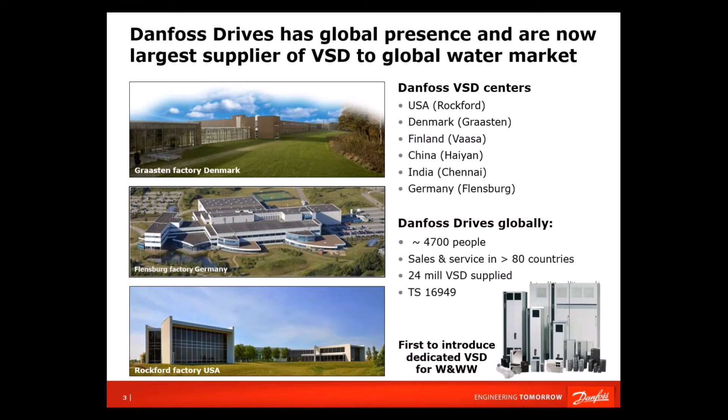We are also serving and supplying into the automotive industry, and that means the whole group complies with quality demands from that industry. But not more about Danfoss - that was just a super short introduction to who the group in fact is.

But back to water and the serious issues about water. What you see here is a picture from the World Economic Forum, where people meet in Davos. You probably have heard of government people, NGOs, CEOs and so on meeting once a year, and one of the things they are asked as participants is to try to paint a picture of their point of view on what type of crisis the world could potentially face within the next 10-15 years.

What they ask is basically to evaluate from two points of view: the well-being of people, and economical growth. So what could limit these things? They look at the likelihood that a crisis will appear, and if it appears, what is then the impact of it? And what you will see - at least the first time I saw it, a little bit surprising - is that a water crisis is very high on the agenda. It's very likely that within 10-15 years we will hit such one.

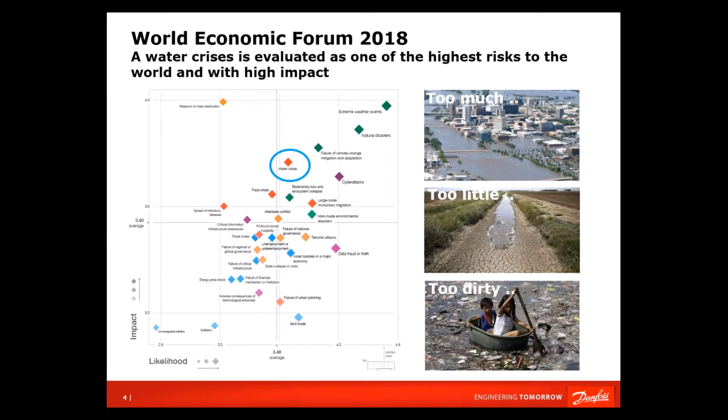There will be places where the biggest problem is too much water, as we see in the top picture, and there will be places where there's no water. There's also a lot of places where the water is too dirty. In fact, only 20% of all wastewater on the planet is treated right now.

But if we look a little behind how that can be, it's important to realize that when we normally think about water, we think about water supply into the cities and households. But water is also fundamental for close to 50% of our food production, which depends on irrigation.

So if there's no water, the farming industry will not work, and that will hit a lot of other industries. The same is true on the energy side, where it's claimed that around 90% of all energy production depends on water for cooling purposes. There are facilities around the globe where power plants had to reduce their energy production simply because there was not enough water.

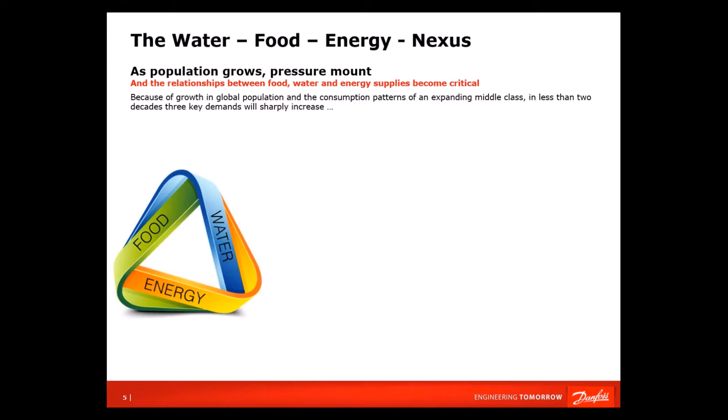What is also the case is that water is already over-abstracted in a lot of places around the globe. We have California as a case, we have the southern part of Europe as a case. We know there are places in both India and China and elsewhere where groundwater is used much faster than nature is able to regenerate it. So that's where we are now.

If we look 20 to 30 years out, we all know the population will increase. We also know, which is a very good thing, that more people will move out of poverty and into the middle class, and that more people will move into cities. It's expected that within 20 to 30 years, 70% of people on the planet will be living in cities.

That, of course, puts pressure on needing more food and more energy, and at the same time there are other things which influence water consumption. One question is why it means something that people move into the middle class—the reason is that the type of food consumed tends to change, to a type of food which consumes a lot more water.

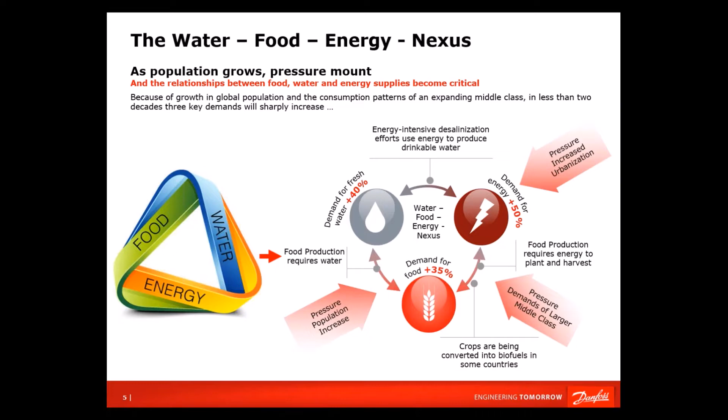The end of this story is that it's expected that within the next 20 years we'll need 40% more water than what we're using today, and that's on a basis where we're already overdrafting the water resources we have. So saving water and finding solutions is a key thing—that's why water is so high on the agenda around the globe.

What a lot of people may not be aware of is that the water industry is not only super important for the food industry and power generation, but is itself a major energy consumer. We at Danfoss have worked with the International Energy Agency a couple of times, first back in 2016, related to the water industry, and they made a global survey and estimation.

on how much energy the water industry is in fact consuming, and came to the conclusion that around 4% of all electricity on the planet is used by the water industry. This is equivalent to all the electricity used in Russia.

What is maybe as interesting is that 30 to 50% of the electricity bought by municipalities is related to the water industry. And in 2018, they also looked at the Sustainable Development Goals, and as part of that is to build a lot more wastewater facilities.

If we comply with these goals by 2030, you could build traditional wastewater facilities, or you could build what I'll tell you something about—wastewater facilities which are able not only to clean wastewater but also to generate electricity at the same time.

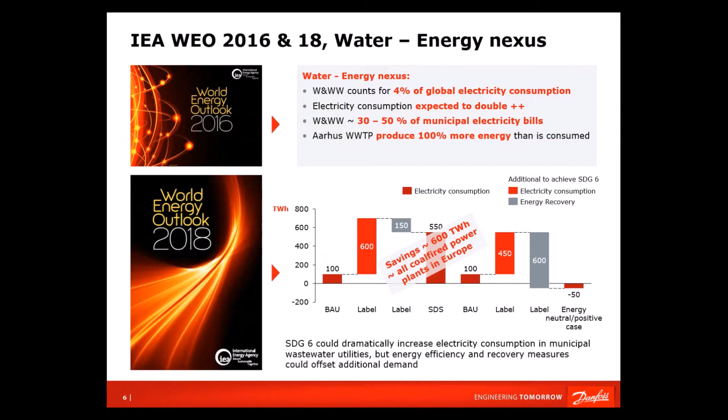The difference between these two approaches, as they found, was close to 600 terawatt hours—to put that into understandable terms, that's an energy volume equivalent to being able to close all coal-fired power plants in Europe.

So this means something. And finally, as an introduction, also a little bit from Canada, splitting down further what the authority's electricity is used for. And as you can clearly see here, the water and wastewater facilities are the high runners. There's also a comparison here to street lights, showing that water and wastewater facilities use 5.5 times more energy than street lights.

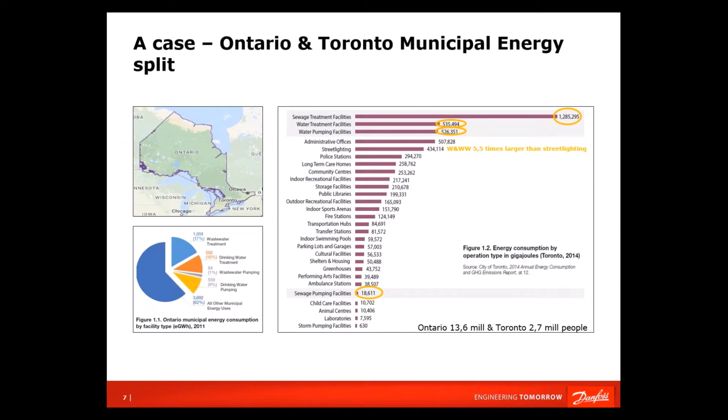So, looking at water and wastewater facilities, why is there so much to gain by using a lot more smart process control? The very basic reason is that if you had a food or chemical facility, you'd probably start at 6 o'clock in the morning and close down maybe 4 o'clock in the afternoon, or if you run 24 hours, you'd run pretty stable at 70-80% of the load.

If you look at the water industry, then as we all know, it's fluctuating up and down - we have 10-20% load during nighttime, a peak in the morning and afternoon, and we run 24/7, 365 days. So it's an industry where, whether we like it or not, the fluctuation is very high, which means that if you don't have a system that automatically adapts to these fluctuations, you'll use far too much energy and chemicals and other things.

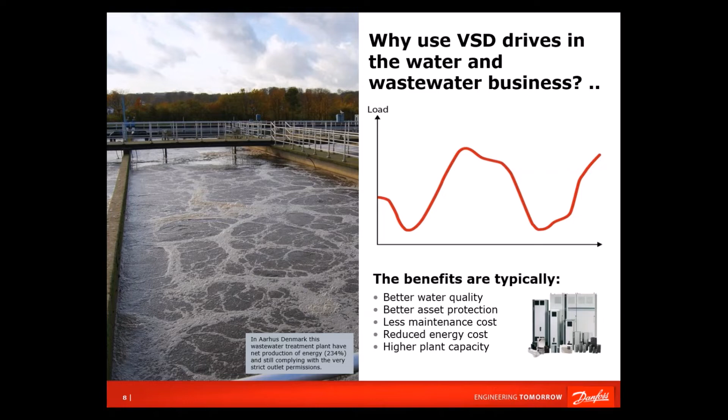So that's why we see that when facilities really try to go to the full extent of what is possible - what nowadays is called digitalization - we see major results, and I'll come back and explain about these. If we look at the whole water cycle and what they have done in the case I'll refer to here, they've had a 2-tier strategy to reduce net energy consumption. The first has been to secure that you reduce energy consumption as much as possible during all the phases.

So if you look at water production, they've cut down on the energy cost in relation to providing raw water. They've made major cuts on water distribution, and we'll come back and talk a little bit about that. They've also been able to cut the energy consumption on wastewater pumping, as well as on the wastewater facility. And what's important at the wastewater facility is that if you do it right there, which we'll also come back to, you'll be able to generate lots more energy.

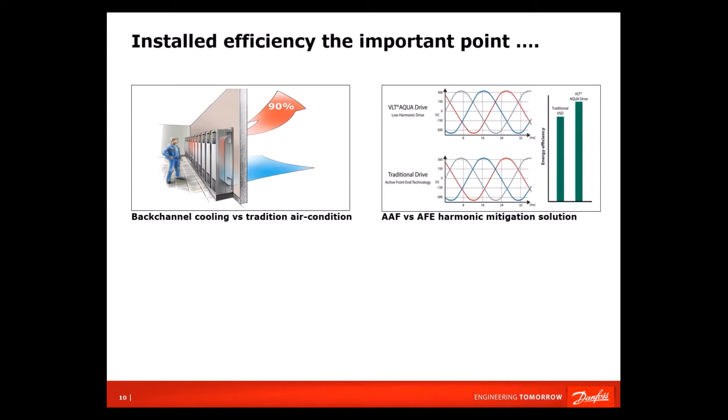But some of them, especially for the water industry, advanced active filter technology will do the same job or better job than traditional active front end, but will do it using a lot less energy.

Without deep diving too much into this, the results show that by choosing one variable speed drive supplier versus another, you can see 2 to 4% difference in installed efficiency. You could also choose to step up in motor efficiency, but that would only offer around 1% gain. So instead of stepping from an IE2 to IE3 motor, you could gain 2 or 3 times more energy savings by choosing the right variable speed drive solution.

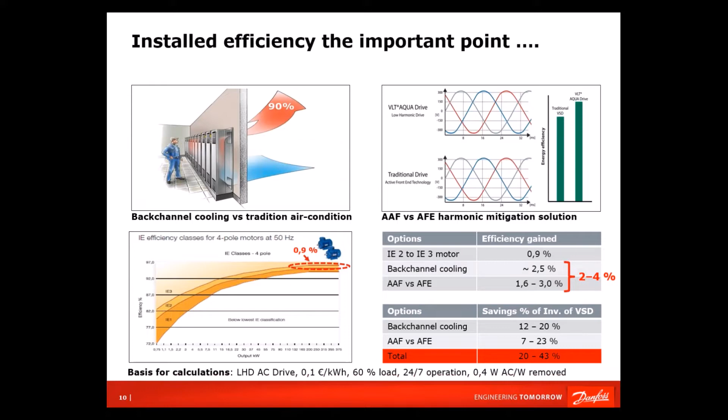Which of course from our side is the Danfoss solution, where we have these opportunities both on the heat side and on the harmonic mitigation side. Coming back to the process part of it, this was just mentioned a little bit about how it's important to have efficient components.

But on the process side, we know that when we are supplying water into the network, we see leakage, and it can be quite expensive to repair and handle. What you see here are a few pictures with figures indicating non-revenue water as a percentage, fluctuating from 4 or 5% up to 50, 60, or even 80%. So leakage is a main issue.

In the US, it's claimed that there are 850 water main breaks each day. So it is a real issue.

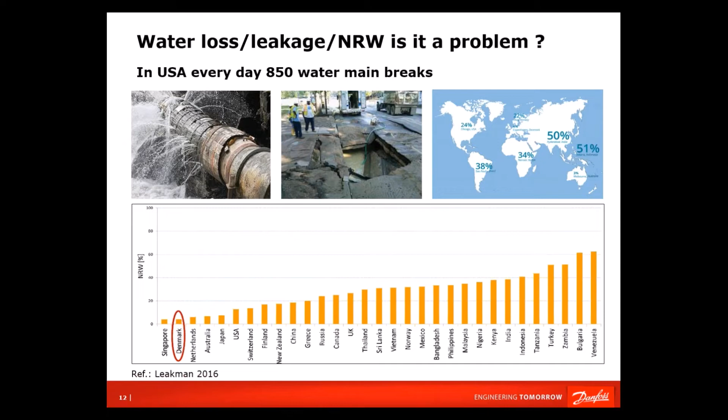What then to do about it, or what type of leakage do we have? I think it's important to realize there is what we call background leakage, in joints and so on, where there's small leakage going on underground, not visible. There will be cracks in the pipes, also not visible, not large enough that the water will just run out into the ground.

Finally, we also have the type of leakage where water is coming to the surface, as we just saw in the previous pictures. Now what's interesting is that when you look at the tools you can use, pressure stabilization and pressure reduction is in fact the tool you can use to attack all three of them.

Of course the last one, where it's coming to the surface, you have to repair the pipes, no doubt, but otherwise pressure stabilization and pressure reduction will be a key thing. Quite often it's thought that these major bursts, where you see water flying 5-10 meters up in the air, is where the main water loss is.

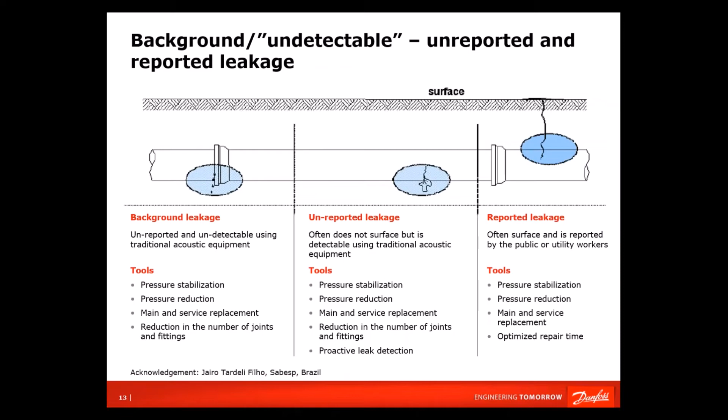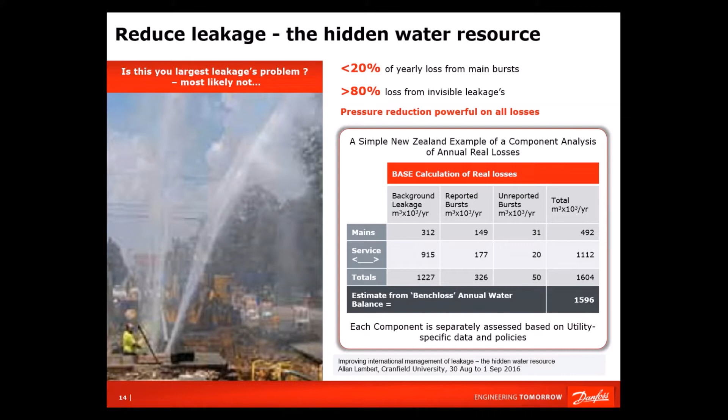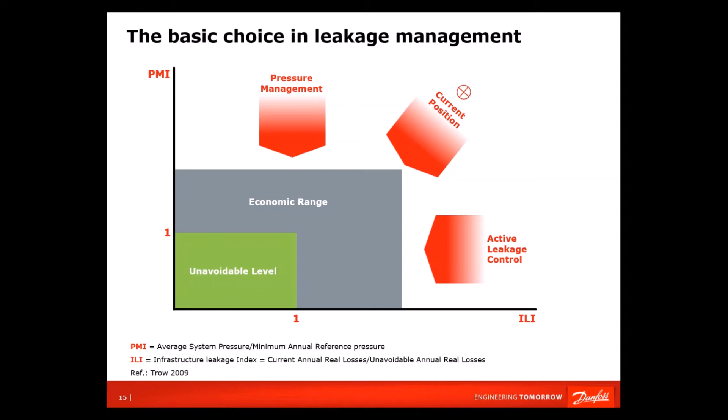The reason is that these leaks are running 24/7, 365 days a year. Therefore, to really get leakage down, it's important to look at pressure management. So what can you do about leakage? You can do pressure management, as we've touched on, and you can do what's called active leakage control, which is basically to replace pipes. But nobody can usually afford to replace all the pipes, so it doesn't make sense. As we've just seen, if you want to attack the 80%, pressure management is the cheapest way to attack that.

And what do we then mean when we say pressure management, and what is the thinking behind it? If you look here, imagine we have a city with a couple of high-rise buildings, and we assume we want 20 meters of pressure on the taps in these buildings, then we would need a pressure as indicated here with a green line.

If we then have one single pump at the waterwork, and we also have a small hill here where maybe a few people are living, you would have to ask this pump to put the pressure the whole way up to what is stated here as the original hydraulic grade line. You will have some pressure loss, but you'll see that the people living on the hill also have their 20 meters of pressure, and the people living in the city also have their 20 meters.

In fact, they have probably 60 or 80 meters of pressure, so they have a lot more pressure than they actually need. Besides consuming a tremendous amount of energy, this is also stressing the pipes. So what to do about it?

One solution is to install what we call a boosting pumping station, basically a drive, a pump, and a pressure transmitter. That means the pump at the waterwork only takes it halfway now, to an optimized hydraulic grade. There will be some pressure losses, and then the boosting pumping station takes it up from there, and again the person living on the hill will have his pressure.

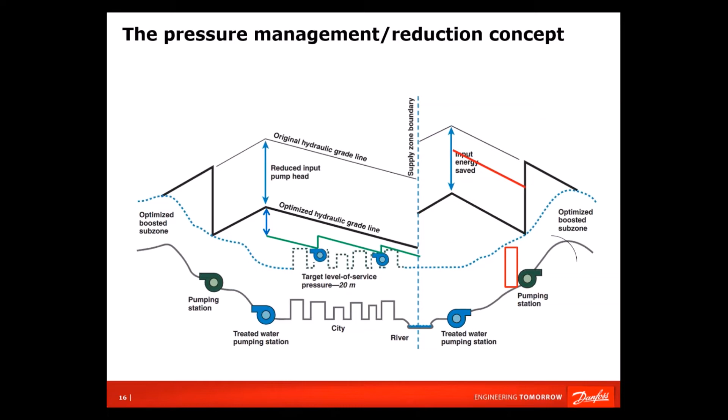This is from a case in the US, where they were pretty sure they were in control of the pressure, but it showed there were a lot of spikes when they began measuring the pressure in real time in the network. I won't deep dive too much into it, but again, one thing is getting the pressure down, and another thing is avoiding these pressure spikes, as you see here.

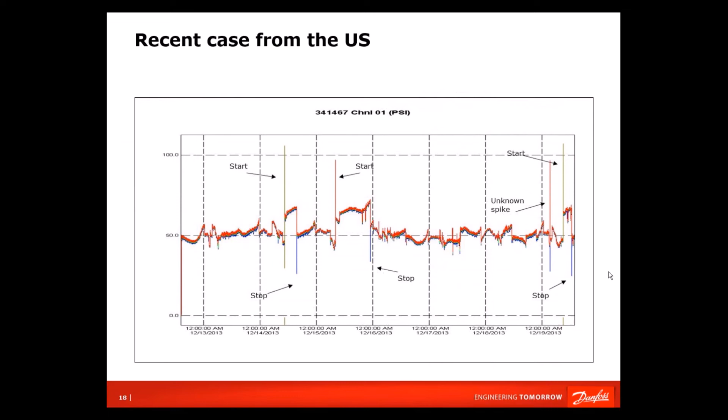This is a little bit interesting, because we all know the water network differs from city to city, so it's difficult to come to a single conclusion and say this is just what everybody has to do. But the basics we can say something about, because this is an overview of statistics from 112 systems in 10 different countries where they tried pressure management.

What they gained on average was a 38% reduction in pressure, which offered them more than a 50% drop in the amount of new breaks. Immediately after installing this pressure management — basically without replacing any pipes — they were able to cut their water leakage by close to 40%, and energy consumption also dropped by 20 to 40%. The pipes will most likely last longer, and there will be fewer complaints from the people in the city. I think it's quite impressive that you can gain so much without replacing pipes, just by going in and regulating the pressure.

So that was a little bit on water distribution.

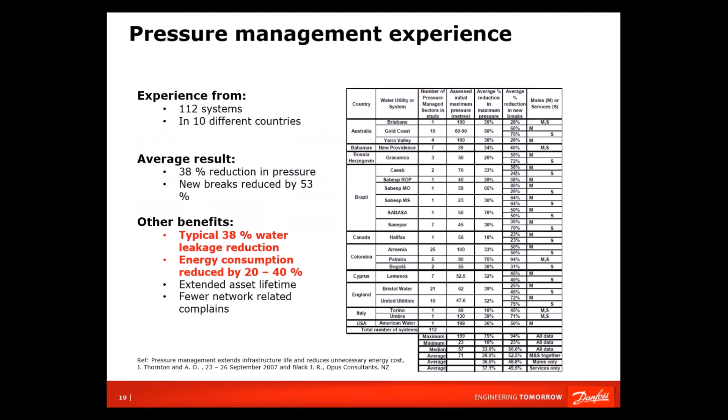Then on wastewater pumping, usually the thinking is that there is not so much to do because it's typically gravity forced. So the water is basically running just based on gravity, and then it's lifted in a pumping station. And one can say, what can you do to save energy there?

One of the things one can do, which we have embedded in our Aqua Drive as a standard, is what we call deragging, which basically is a function to secure against wastewater pumps having a tendency, especially in the sewage canalization system, to clog over time. One way to avoid this is to have the drive measure the power consumption at a given speed. When the power consumption goes up at a given speed, in 98% of the cases it will be because of clogging of the pump.

What the variable speed drive will do then is turn the wheels in the pump the opposite way. In fact, it will not only turn it, it will start running a little bit forth and back, and in that way it will make a type of washing of the pump, getting rid of all the dirty stuff clogged in the pump.

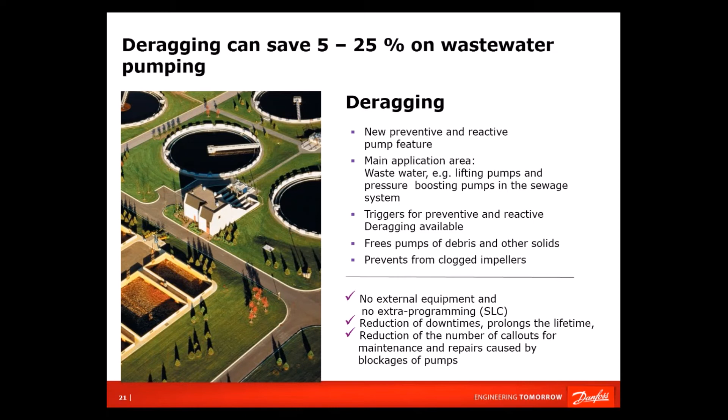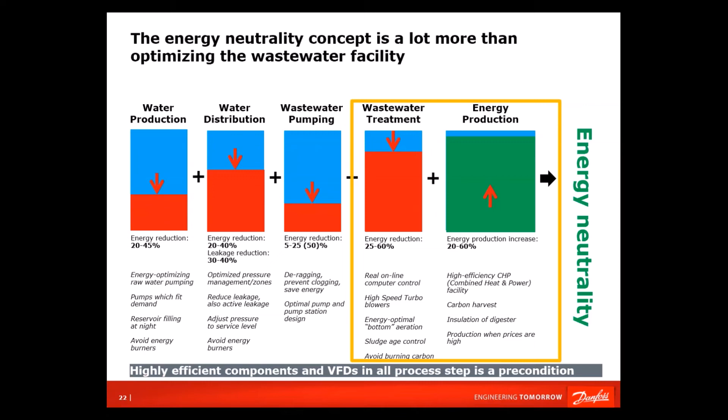Finally, to the wastewater facility - there is a lot to do, and a lot of processes one could go into. Before we do that, I would like to show you the figures. This is a case from Denmark for 200,000 people, where you have both the drinking water network and the wastewater facility.

If you look at the figures here, you will see they used 3.2 million kilowatt-hours on providing drinking water, 0.8 million kilowatt-hours on pumping wastewater, and to treat it - you can see the figures here to what level the wastewater is treated - 3.2. So in all, for the water cycle as such, for these 200,000 people, they used 7.2 million kilowatt-hours per year.

They have been able to get 4.8 million kilowatt-hours in electricity production and 2.6 in heat, which is surplus heat they are using in the district heating system, offering them 7.4 million kilowatt-hours. That means they are producing more energy than they need, both for providing drinking water, pumping wastewater, and treating the wastewater.

If you look at the treatment facility, the wastewater facility itself, it's producing 234% energy, meaning 134% more energy than it needs for treating the wastewater. So we are not only talking about energy neutral wastewater, we are talking about it producing double the amount of energy needed for cleaning the wastewater.

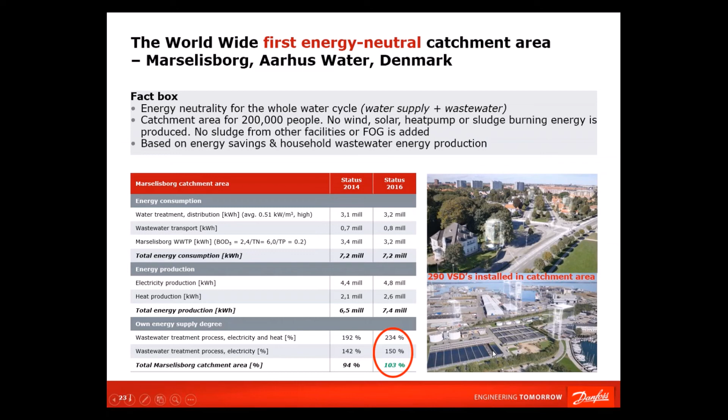You can see the picture of it here. It's a standard, by the way very old, wastewater facility activated sludge treatment plant. So there's nothing special or fancy about it, besides a tremendous lot of sensors and a tremendous lot of variable speed drives. So if we look at what was the key in this, what have they done?

A tremendous lot of sensors have been installed there, including sensors which you normally would doubt whether you could use or not, and they have found, based on some software, a way to get reliable signals from these sensors.

Then, what we of course like, is that they have variable speed drives on whatever can rotate - all motors, they have variable speed drive on.

They are thinking differently about wastewater, thinking of it as a source, not a problem, but a source of energy and other things coming in. So they are looking at how they can harvest as much carbon as possible in the first phase to get as much as possible for their digester. High efficient components we have touched on.

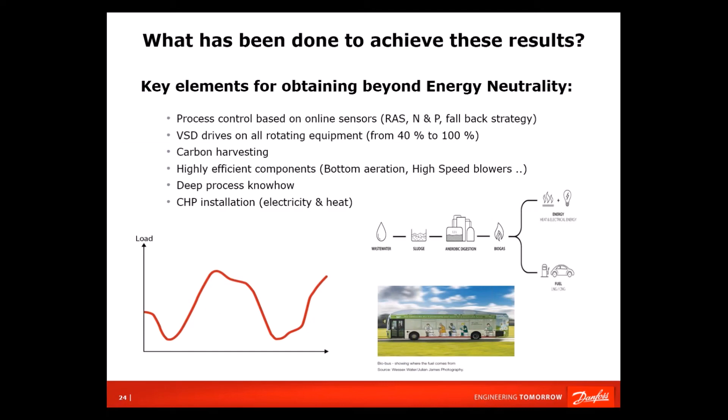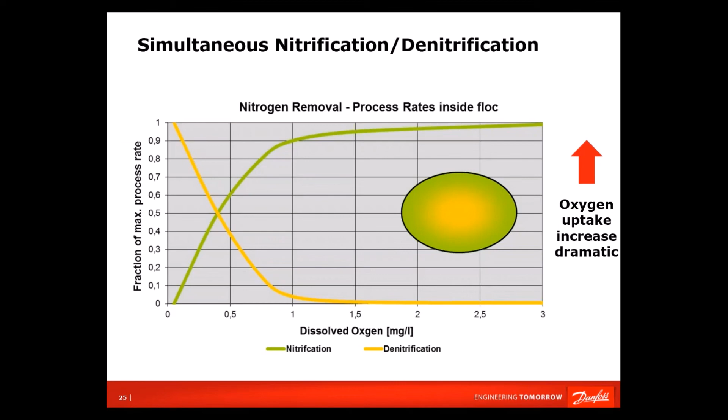One of the process points they have used is that they are removing ammonium, using a simultaneous nitrification process controlled on ammonium and nitrate sensors, basically not on oxygen. The consequence is that your oxygen concentration is super low, creating a situation with very low oxygen concentration, which means your aeration system efficiency is going up and improving quite dramatically.

They are also using side stream anammox, which again uses a side stream - that means from your sludge dewatering, the reject water you get there. What it basically is, is a process where you will be able to treat the very high ammonium concentration with a lot less energy and less carbon, which means you have more carbon for your digester.

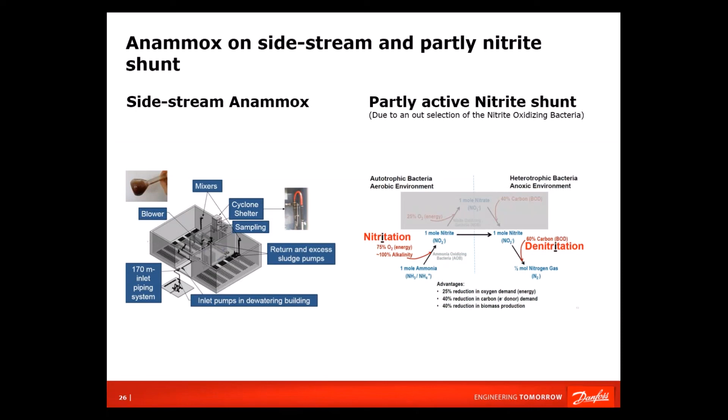What they also are doing is partly active nitrite shunt, and that comes back, part of it, to the low DO concentration and the type of bacteria culture they have there. That means part of it will be handled by the nitrite shunt, which means you will save energy and use less carbon, so you have more carbon for energy production. So the concept in a lot of this is that on the wastewater side you can save energy, and at the same time get more carbon for your digester - not only saving energy, but increasing energy production. That is in fact the trigger behind some of this. I think this is pretty important.

If we should summarize some of the things I've said here, both the water loss side and the energy neutrality come down to using a lot more real-time sensors, relied on so much that you let a computer system control it. You need controllability, which is basically what the variable speed drive offers, so you can regulate pumps, blowers, mixers, and so on. You of course need to understand the process in depth and have process control.

But if you visit the facility, you would see it's not a super big system. It's done pretty simple, but knowing exactly what to do. The key message here is that if they look at where they have gained the improvements - and we have other facilities coming with the same statement - the claim is that 70% of all the improvement they have gained is coming from

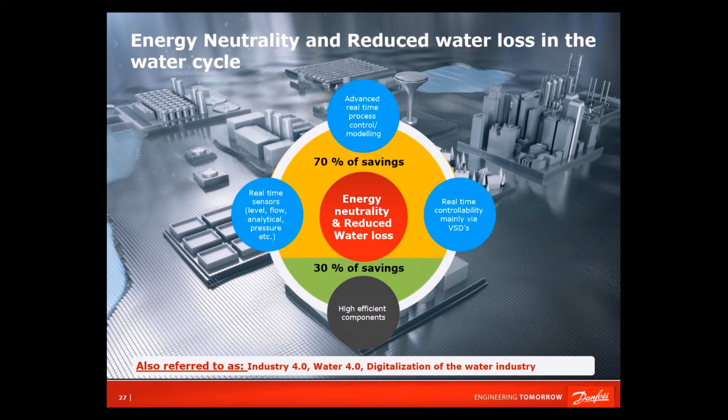process control, or digitalization as it's called. So the sensors and the variable speed drives are in fact the ones who, together with process control, have offered 70% of the savings, whereas 30% is coming from more efficient components, such as high-speed turbo blowers and so on.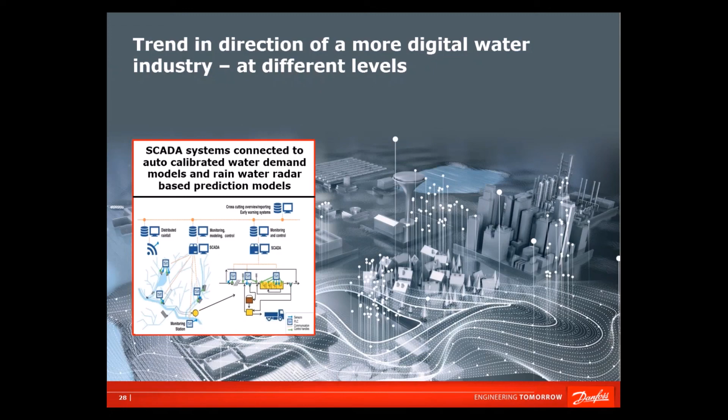So that is basically the trend in the industry - to use a lot more sensors and a lot more variable speed drives, combined with more SCADA systems or process control systems, which by the way will also be interconnected. The other thing I touched on a little is that the components, especially variable speed drives, are getting a lot more intelligent and advanced. We were touching on this just as a case feature - you can automatically clean pumps based on the deragging function in the drive.

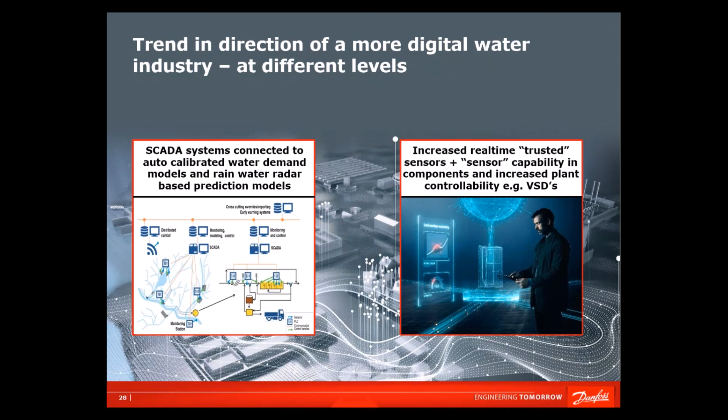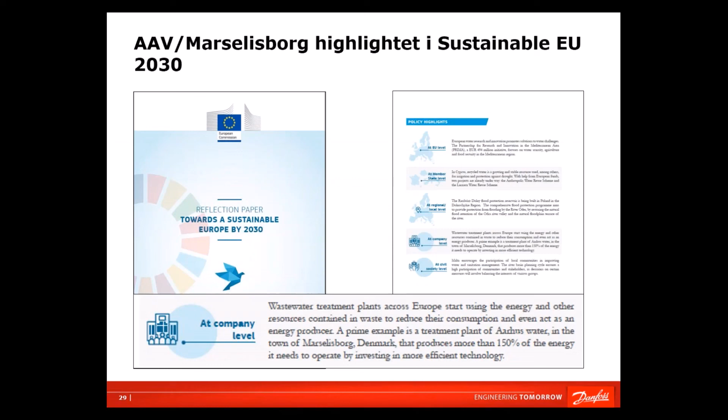And finally, the facility I just mentioned has in fact been in a sustainability report for Europe, being highlighted as a prime case in the whole of Europe. And it is, to my best knowledge, also the first place on the planet where you have an energy neutral both drinking water and wastewater treatment. That has also made some noise around the globe - we have got a couple of awards from different countries. I will not deep dive into that. So I think that was the words.